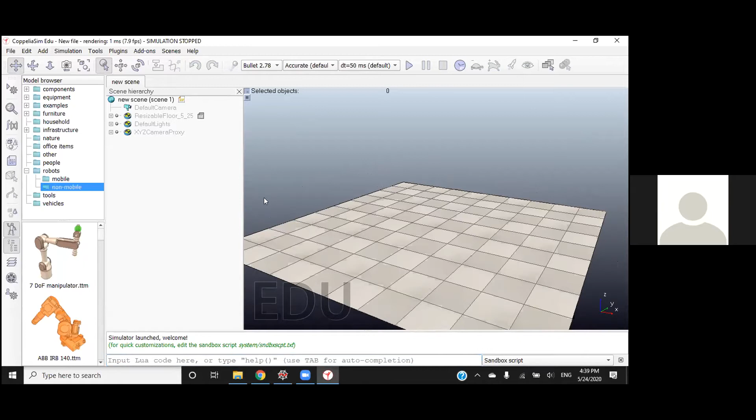Okay, so there are two aspects to this assignment. One is setting up the VREP environment, and the other is setting up the Python code. I will first give you instructions on how to set up the VREP environment right here. So this is how VREP looks for those who have not used it. And I think they've also given it a new name.

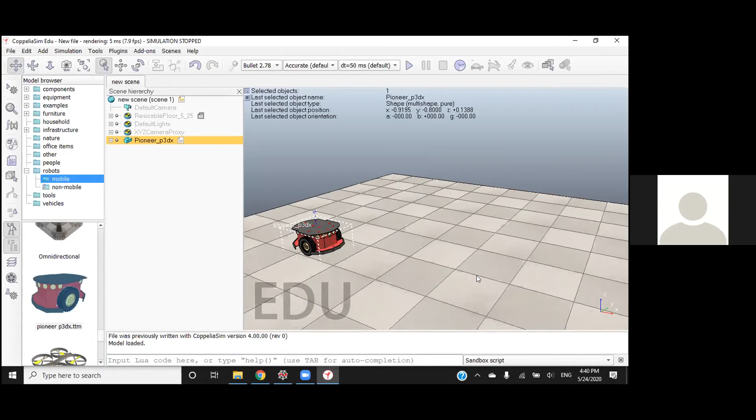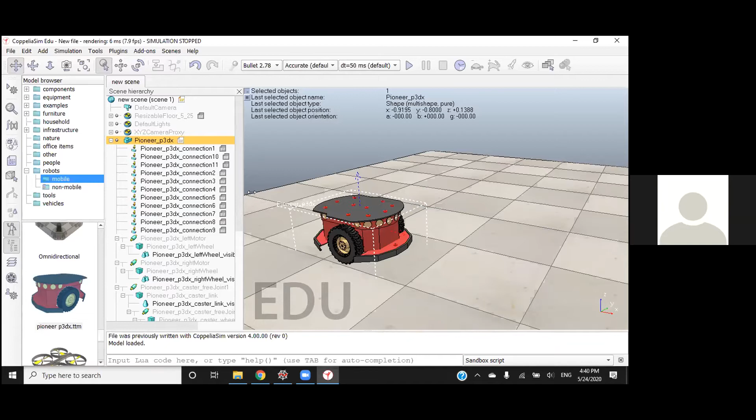We will first import it because it has many of the sensors already inbuilt, so you don't have to do much of the heavy lifting. Okay, so this is your Pioneer P3 DX robot. It's an example of a differential drive robot. A differential drive robot gives motor power to two wheels, and that's all it needs to be able to move around. Now, if you go here, zoom this in.

You will see that this robot is fitted with 16 different ultrasonic sensors. If you recall from the lesson, your ultrasonic sensor is a proximity sensor. It can tell you how close obstacles are, but it's important to keep in mind that the range of these sensors is not infinite. It can only sense within a meter or so. Let's click on 4.

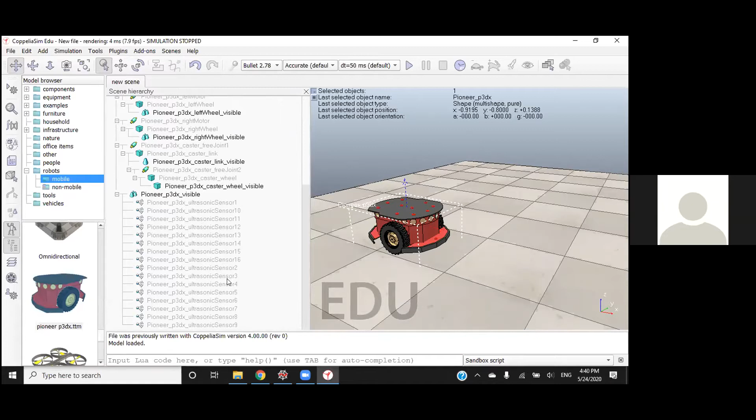Let's zoom in here, and you can see that this is one of the 16 ultrasonic sensors, and this cuboid that you see here is the range of the sensor itself. Now, an important thing to keep in mind is the way they've programmed the ultrasonic sensor here is that it behaves more like your infrared sensor.

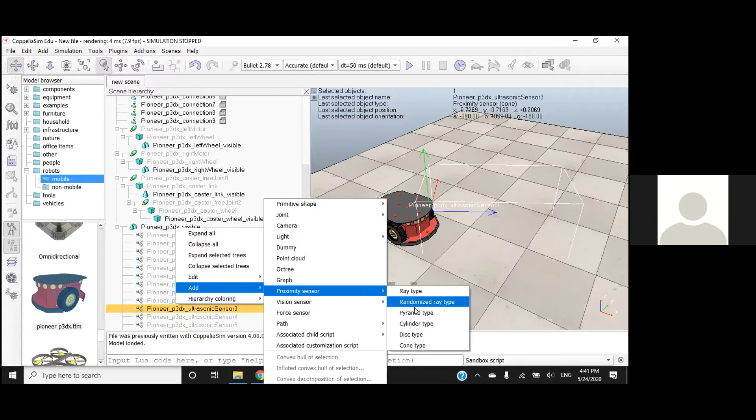That is, it detects in a line, but you can change that by using a cone type right here, but I'm not going to do that. This is just for you to keep in mind. So a ray type is like your infrared sensor, and your cone type is like your typical ultrasonic sensor.

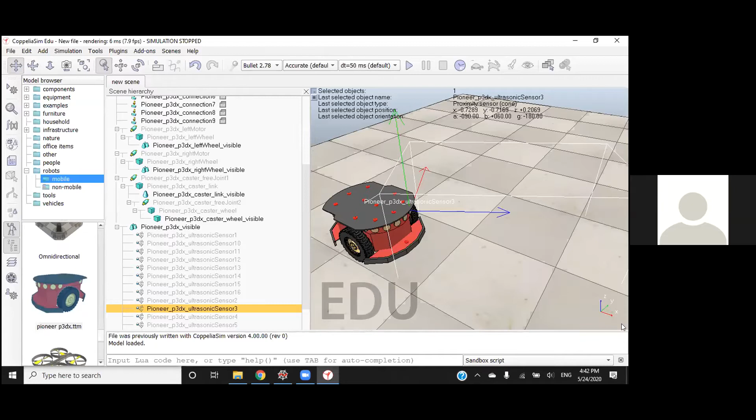Another thing to note is the coordinate frames. Dealing with coordinate frames is a huge issue in robotics. Aditya mentioned this at the start of this lesson, that when he was doing an assignment for a 3D inverse kinematics script, he found it difficult to transform from one frame to another, and that is a huge problem that you should keep in mind. So you can see right here, the global frame operates right here.

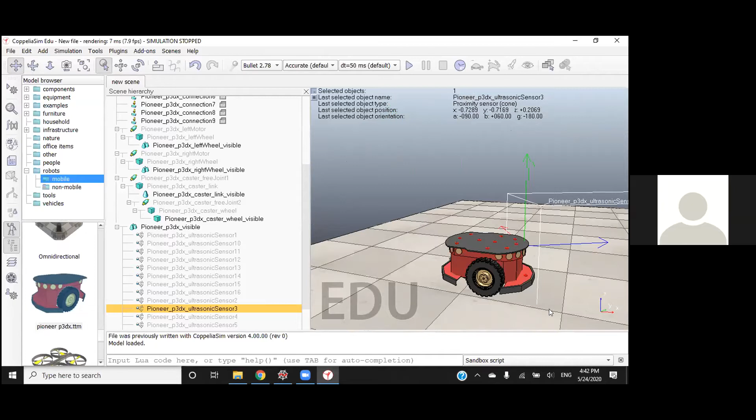This particular thing is the global frame. You can see that the z-axis points up, your x-axis points away from this, and your y-axis is along this plane. But for this particular sensor, your z-axis, given by the blue line, is along the x-axis of the global frame. So this is just something to keep in mind a little bit later. Okay, so this is how the robot looks.

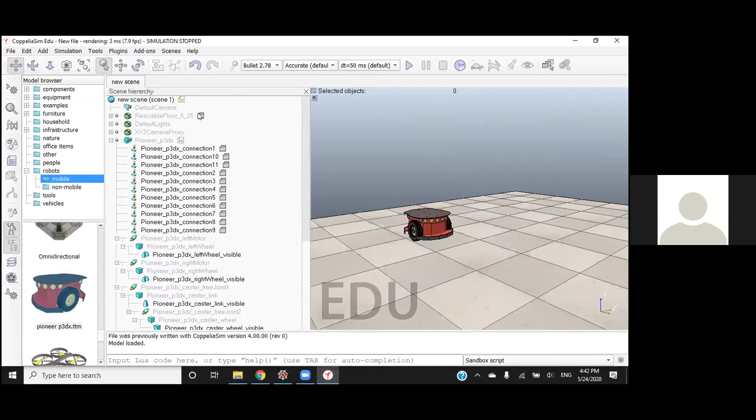Now, if you recall from the previous session, there are two things that you need to do so that you can control this robot using Python. Okay, so the first thing is click on resizable floor here and click on this script-like thing. We need to first open up a communication channel between Python and VREP. And to do that, you need to add this piece of code right here.

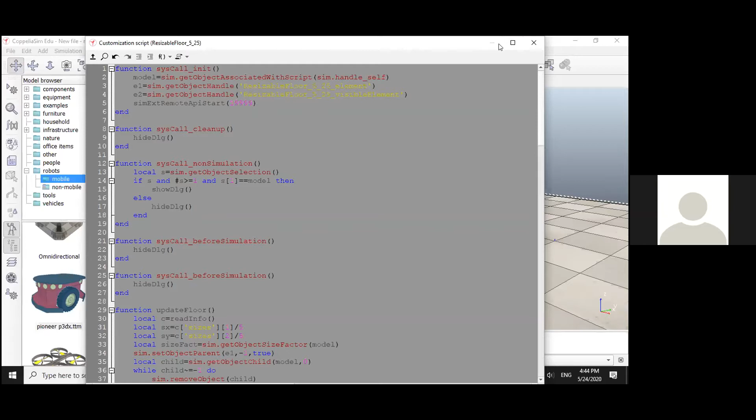So what this does is it opens up a communication channel between Python and VREP on this specific port, 19999. You can change this number to whatever you want, but it's better to always use the default settings, because you don't know if some other number is used for some other port that we are unaware of. Okay. So now that we've added that, let's go ahead and increase the size of this map a little bit. Okay. Perfect.

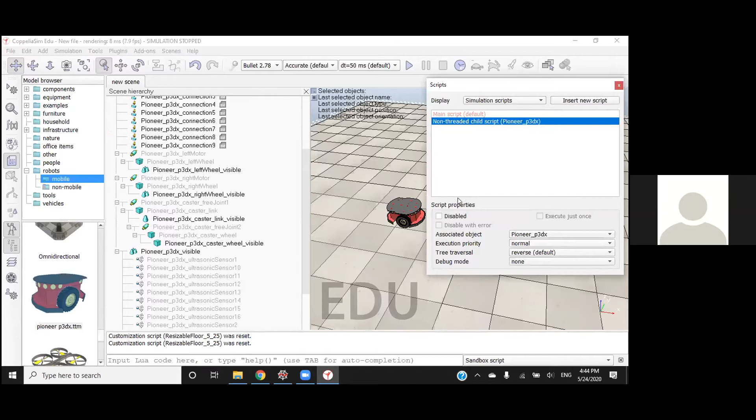Okay, so now we have the robot right here, and we've also done one of the two things that we need to do to enable Python communication. The second thing is you need to go into Tools, Scripts, highlight the Pioneer robot, and click on Script Disabled.

So what this essentially does is one thing. Any pre-defined robot in VREP, right? They all come in with a script itself. So for example, the Pioneer P3DX script basically runs its own obstacle avoidance. Somebody has already written their own obstacle avoidance algorithm.

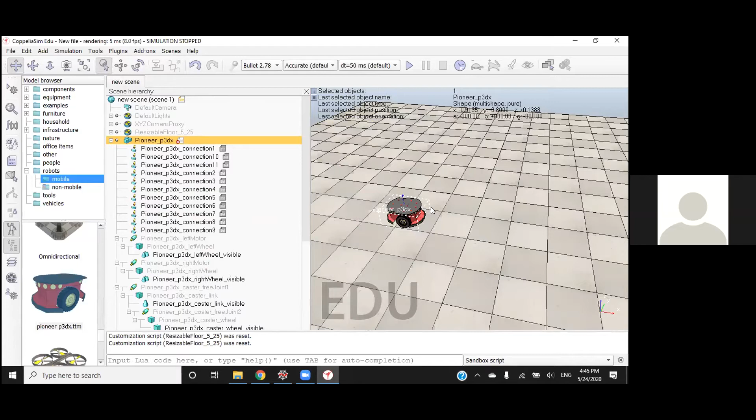So if you were to just hit the simulation at this point without disabling that script, as I just did, the robot would end up moving. And you wouldn't want that because you want to run your own script. Okay. So those are the two things that you need to do. And once you do that, you can add an obstacle.

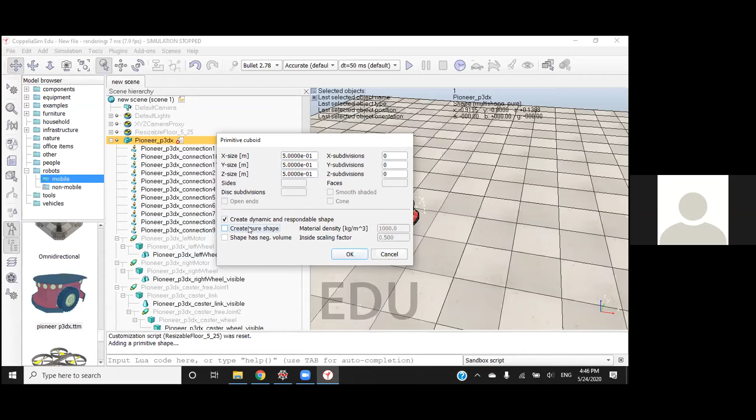Go to Add, go to Primitive Shape, go to Cuboid, and you basically have to choose an appropriate size. Oops, sorry. And you have to disable this Create Pure Shape object. If you don't disable this, VREP cannot make this object detectable by the ultrasonic sensor.

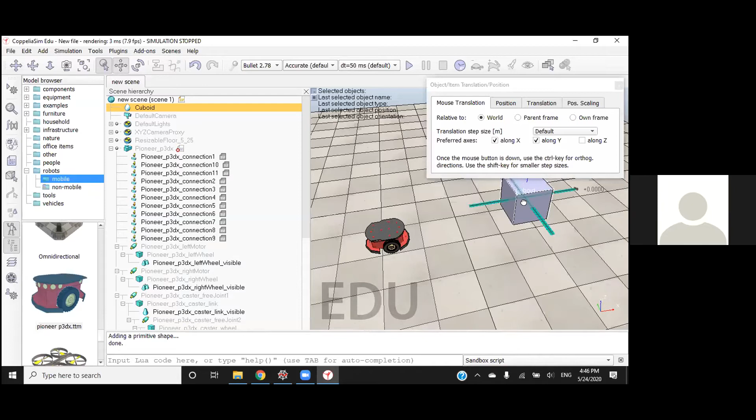Okay, so now we've added a block. Now we just need to move it so that it is within view of the ultrasonic sensor. So this is how you move it. You have to click on this symbol right here, and you can just drag it.

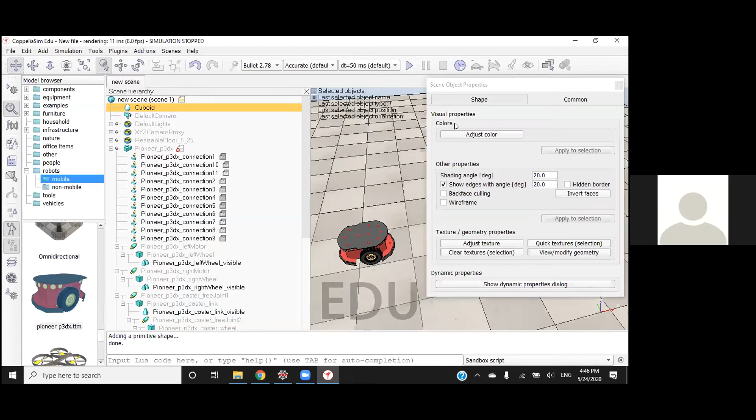Okay, so now we've added the robot and the object as well, but we need to make sure that this object is detectable. This is something that you just need to do in VREP. In real life, it'll obviously be detectable. So you need to click on this cuboid right here, go to Common, and make it detectable, measurable, collidable.

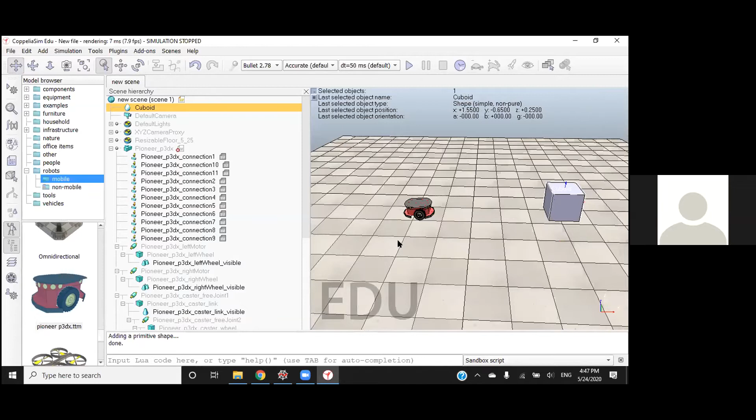Okay. Okay, so that is all you need to do as far as setting up the environment is concerned. Any questions so far?

Okay. And now let's move to the Python script. So I'm using an environment called Spyder, spelled S-P-Y-D-E-R. It's a very handy tool to write Python scripts. It gives you an environment for debugging. It allows you to see what variables are being saved and all that.

Yeah. So this is the entire code. I'll explain it bit by bit so that you don't get confused. There are basically two portions of the code: this half and the second half. The first half basically defines the variables that you need to use. And the second half is this part right here, which basically moves the robot until it gets close to the obstacle.

So you first need to import a couple of libraries. This is how you import libraries in Python. The sim library is your CoppeliaSim. That is this VREP right here. If you import this, you can use all the functionalities of VREP in Python.

Then you need to write some boilerplate code, which is standard code that you just copy and paste. What these few lines do is basically start the communication channel. If you recall, we opened up a communication channel on 19999, and this code starts communication between VREP and Python.

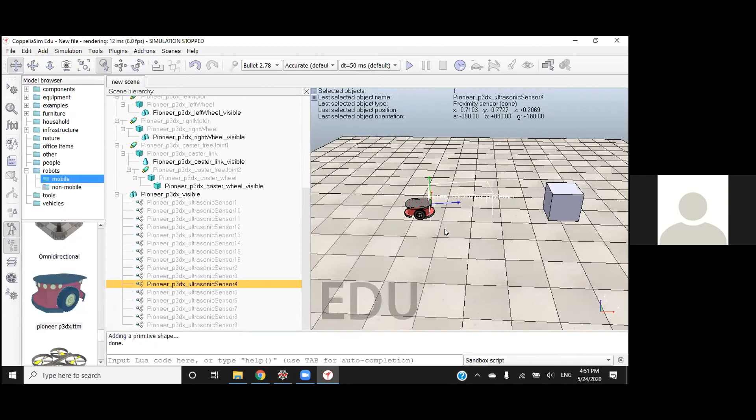So that you can see it is in the view of the obstacle. And again, once you've gotten all the object handles, what you need to do for the sensor in particular is call a particular function twice. One is to initialize the sensor so that it can start recording, and another time you have to call it so that you can actually get the data back.

So simxReadProximitySensor is the function that you're looking for. The first time you call it, it sort of initializes the sensor, but you need to call it again once you're actually running the robot. And you can see the documentation for that here. Whenever you're writing code for something, it's always important to... So it basically reads the state of a proximity sensor. You have to call it at least two times: one is to initialize it, and the other is to utilize it.

Okay, so with that, we can at least start the simulation. Sorry, I'll explain this part also. You'll see it in action in a little bit. Once we've defined all the variables for the sensor and the two motors, we can now start moving the robot. This piece of code moves the robot until it sees the obstacle within its line of sight, and then it stops when it's within 0.5 meters of the object.

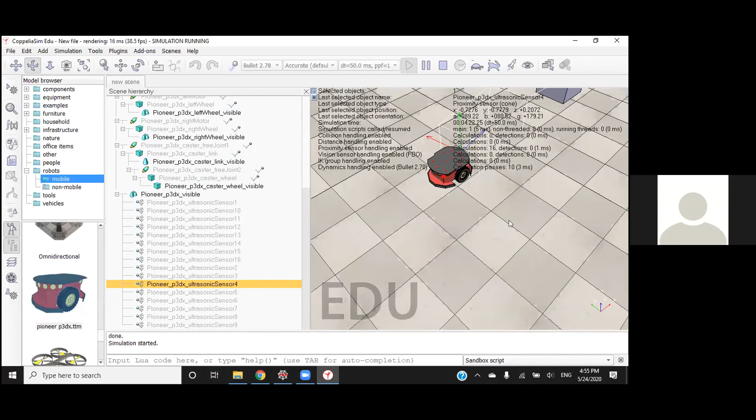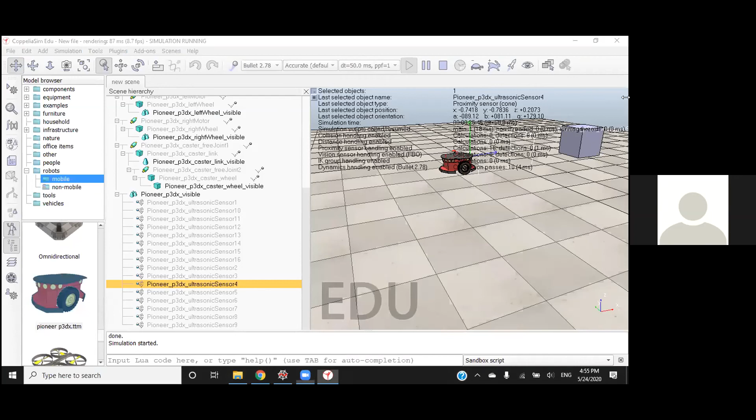Right now it says that it's false. What that means is this ultrasonic sensor 4 cannot see anything, which is true because the cuboid lies outside its range. And because it cannot see anything, it thinks that all the objects are at a distance of 0 from it. That's just how it processes the data. So keep an eye on these three things; they will change once we start moving the robot. Okay, now I'll run the second portion of the code, which moves the robot until it comes close to the vicinity of the object.

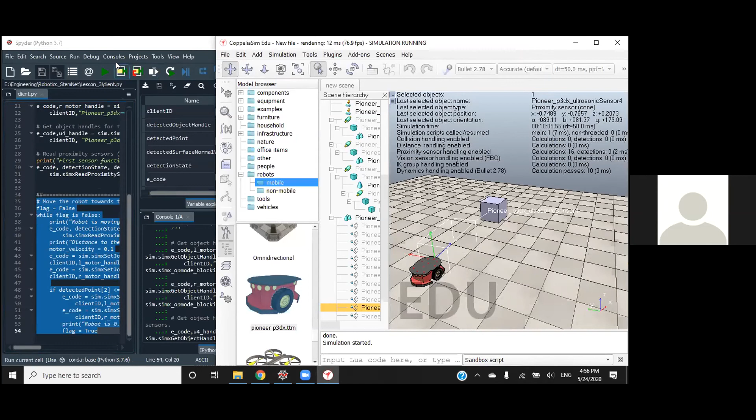I'm moving it very slowly so that you can see what's happening. These are some things that I just printed out. This is a very small number because it is essentially 0, so it basically says that the object is still out of reach. But now you can see that it's actually getting real values. This will continue until it reaches a value of 0.5, and then I've written a control command to make it stop.

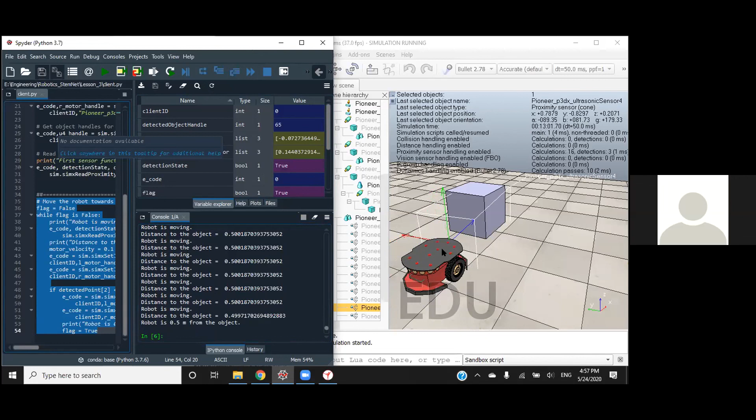Okay, so that was basically it. You can see that the robot has stopped. And if you look here, you can see that all of these have changed. The detected state is basically true, so it does see an object in its vicinity. And these are the values that it sees. This is the value that you need to take into account when measuring the distance. It's basically the distance between the sensor and the object, which is 0.5 meters.

And yeah, that's basically it. That's the sort of assignment that I want you guys to replicate. So with this, you can now move the robot, and you also give the robot eyes.